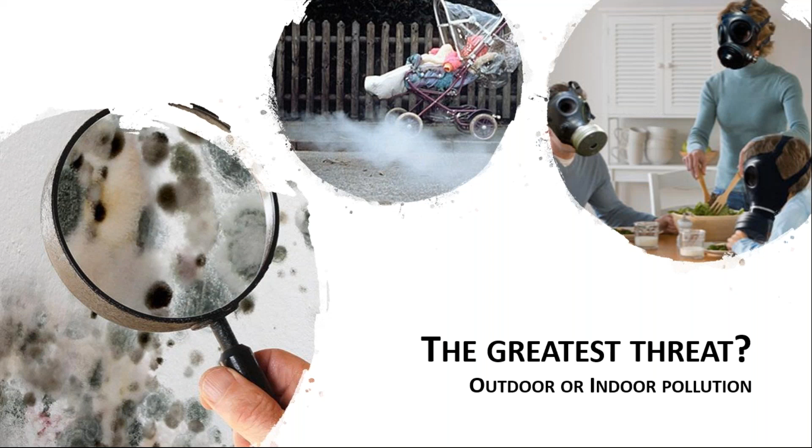Understanding the outdoor environment and how we apply that understanding to developing better natural and mechanical ventilation solutions, and then coming toward the end, what we're dealing with in terms of moving forward and dealing with this pandemic.

If I look at the micron size of the particles, they're very similar to the particulates I'd be dealing with from vehicle emissions and general PM, or particulate matter pollution, that we'd be dealing with in our research. So I'm going to look at the parallels between what we do and how we understand particle transport in a similar context to aerosols.

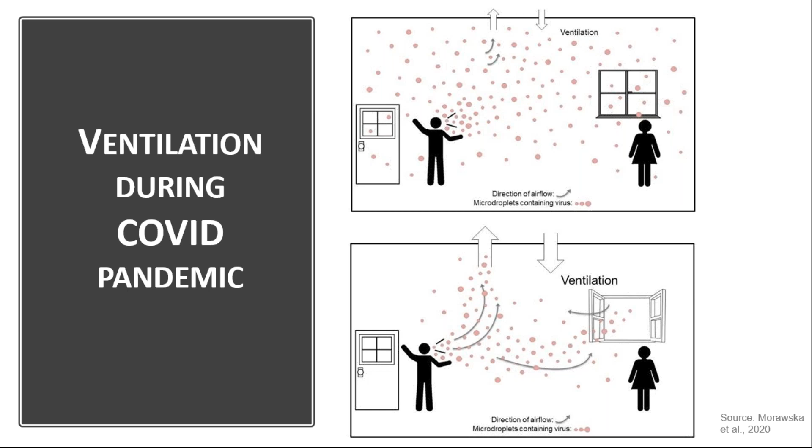Today I've prepared the presentation to start off with a context of how I approach particulate pollution, or aerosol pollution as this may be, as a problem, and then give you an understanding of our work and why we approach it from a mitigation standpoint.

Then I'm going to discuss the outdoor environment and outdoor exposure, which is actually an area we've worked in for many years, but it informs how we look at indoor exposure. And then look at the steps towards providing cleaner air, whether it's outdoor or, more specifically today, the indoor environment.

And then for a few minutes, give you some innovations in terms of mechanical ventilation and natural ventilation design that we have under investigation, or have investigated historically, concepts that can help manipulate or engineer the environment so that particles move the way we want them to, or aerosols in the case of COVID.

But I'm going to finally conclude, before concluding, by returning to my context, specifically the campus that I normally get to walk into every morning in Trinity College, Dublin, and give you a flavour of the challenges we face when it comes to returning to university and ensuring that ventilation is a big part of our face-to-face with students.

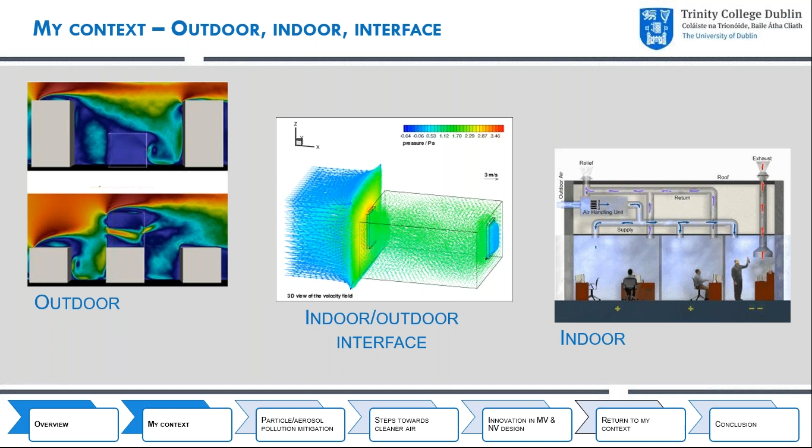So how do we approach these types of problems? Maybe this is obvious to you, but a lot of people are experts in measurement of indoor and outdoor environments in terms of air pollutants. We have many years of experience in this field, and it's very complex. It's not as simple as buying a monitor and positioning it. There's a huge amount of considerations in terms of collecting data in the right location that is representative of a given area.

The same goes for the other environmental variables required to develop and use measurement information for developing models that can look at scenario analysis around the interactions between the outdoor and indoor environment. Many people are working in that area.

So for us, what we've tried to focus on in our work is: we measure, we model, but we always want to mitigate particulate pollution exposure. Our main focus, and our pillar that we try to work under always, is passive solutions. If we can, we want to develop solutions that are low energy or zero energy, so we're always trying to look at energy efficiency, as previous speakers in the program have talked about.

Maybe COVID is now taking away that focus, but even in this COVID environment, we want to present ventilation solutions that are passive in nature, or really zero or very low energy. Natural ventilation is a natural preference there, but it's a much more complex problem to manage and control. That's why we prefer mechanical ventilation, because we can control the conditions.

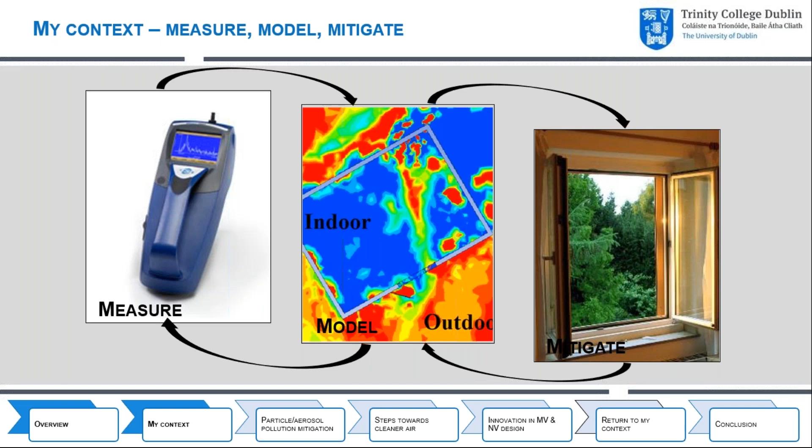But when you have something controllable working together with natural ventilation, which is not so controllable, the question is: are we allowing the outdoor environment to have some level of control in an indoor environment? I'll come on to the context where I feel we're going to have challenges when it comes to returning to university, specifically in more historical buildings.

There are really three different contexts and areas that we've worked in, and they all have interconnectivity in the approach we take. Whether it's a pedestrian on a footpath in a street, trying to understand airflow and pollutant dispersion in that environment requires a complex level of measurement, modeling, and then a strategy developed around mitigation. We've done lots of research in the field in that area.

But then we've also transposed that into mechanical ventilation inlets, and my colleagues are leading in terms of designing novel technologies, which I'll show you later, around trying to keep the particulates out. So really what we're trying to do is reduce exposure, whether it's you in the outdoor environment or the indoor environment, and whether the air is being directly or indirectly transported to you in a passive or an active, energy demanding method.

One area we've moved into in recent years is natural ventilation openings in both residential and commercial buildings. I have an illustration of a window, but you could also think about the small vents in most rooms in modern homes to allow for sufficient air changes. What we want to do is stop particulate pollution entering, but also allow a free escape of a given particulate, or in the COVID sense, an aerosol to escape.

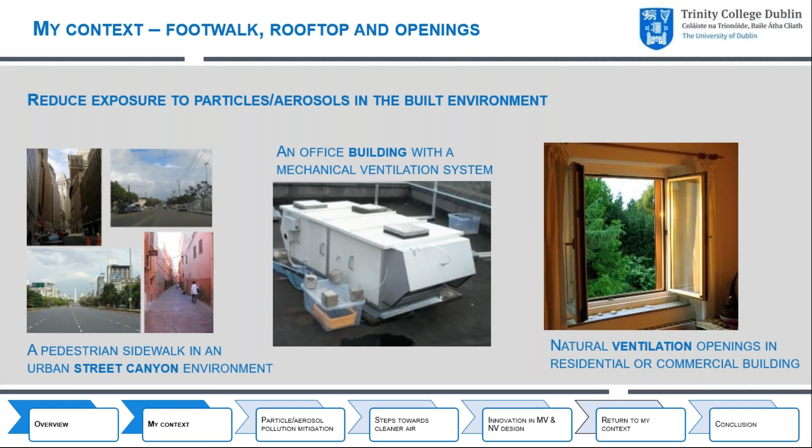So the context, to end on my approach, is that there are short-term and long-term impacts of ventilation solutions. In the short term, we're dealing with this COVID aerosol pandemic. But in the long term, in the life cycle of buildings, what we're dealing with is a problem that will hopefully not linger, but we still want a solution that continues beyond the pandemic, where indoor air quality is considered a priority. So any changes we make now should have a long-term benefit.

In the context of where we approach the problem, a lot of work around the boundary conditions is what I would refer to of the problem. When you consider ventilation, and the figure from a few slides ago around the open window and aerosols escaping, what you're not considering is what is happening outside that window, and where are the aerosols going. If you're facing a very strong wind, how is that natural ventilation outlet behaving, and how are air change rates being affected in that space?

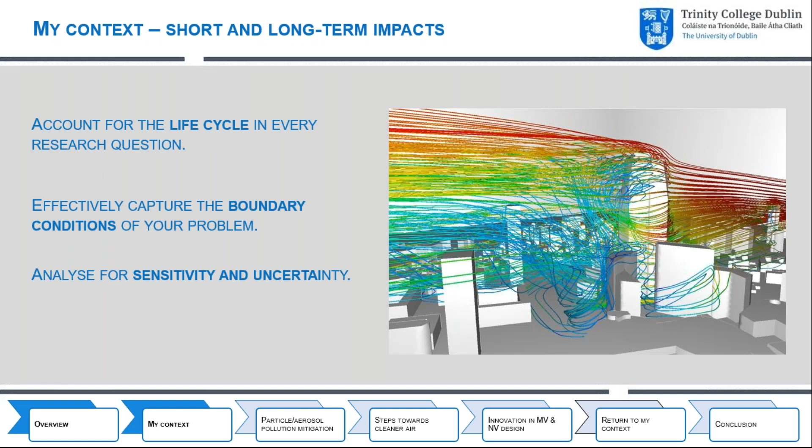This is historical buildings or older buildings that have combined systems that were not designed in unison, creating a lot of challenges in this space. So there's a lot of uncertainty around how we analyze and build up the most suitable ventilation system that works and allows natural and mechanical to work in harmony, or if natural is on its own, to be effective in the pandemic circumstances.

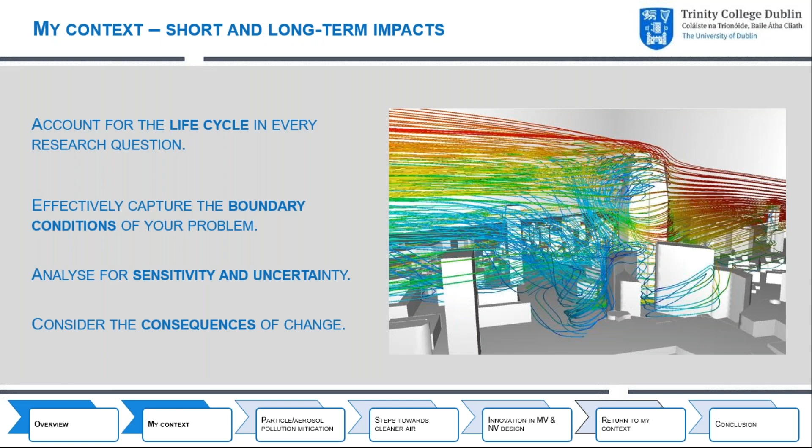So the consequences of change is really what we're trying to ensure. And again, this long-term impact—that we make changes for COVID—will they have positive impacts beyond that?

So from an outdoors perspective, even your simple street is a very complex environment. When it comes to particulate transport or aerosol transport in the air, no two streets are the same. This is a very simple illustration of a three-dimensional street. Forgive the crudeness, but it's just to show that there are some predominant airflow patterns.

What's missing is that once you add physical features into such a space, you create turbulence and additional, more complex airflow patterns that can affect the personal exposure of an individual walking on the street, but also the ventilation capacity of a natural ventilation opening—a window or a door, to a shop or a domestic home, or a window on a first or second floor. The more complex the 3D geometry is, the more influential the role of natural ventilation may have on air movements in the home.

So just opening a window doesn't assume the air is going to escape. A lot of people think opening a window in one room will naturally change it, but the outdoor environment in which you're opening that window can have a significant influence.

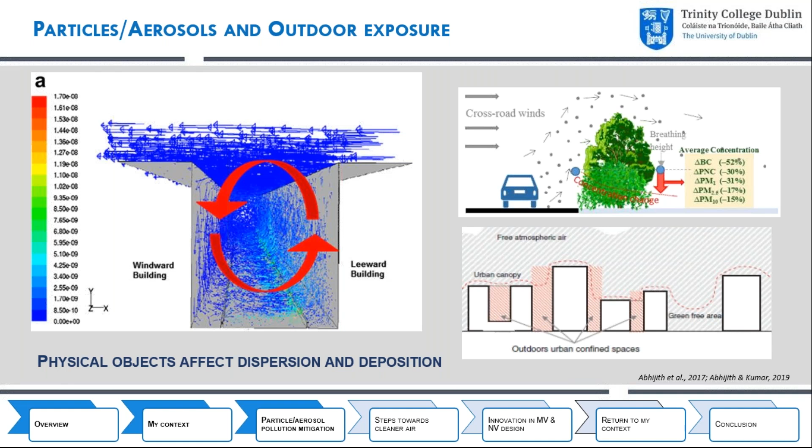So some of our work is around developing mitigation measures—barriers, physical structures—in the outdoor environment of a street, trying to improve air quality for an individual. But the challenge is always ensuring you're dealing with a very dynamic environment. You want a solution that improves air quality and doesn't trap pollution as well to some degree. Trying to create a solution that has a long-term benefit is quite tricky, with knock-on effects to the likes of ventilation ducts on facades of buildings being another one.

So the question is, when it comes to urban morphology, this really complex built environment, how do we design effective ventilation? For example, most recently we've been working around the area of coffee shops, and unfortunately, like many of you perhaps, I haven't visited many coffee shops recently. We hope that would return quite soon.

The idea is that ventilation into perhaps a small coffee shop is predominantly through some mechanical outlets, but also the front door or windows provide a strong feature, and the effective design may have incorporated those considerations. But then a coffee shop decides to put awnings and barriers around their outdoor environment, creating an outdoor seating area, and that completely changes airflow patterns.

It stagnates the air. It also affects very much the airflow into and out of the coffee shop. So what's important is trying to understand and consider these consequences, these added components, and how they affect indoor-outdoor exchange, and also trying to use them to our benefit. How do we design it so that we get the outcome that we want? How do we improve the circumstances?

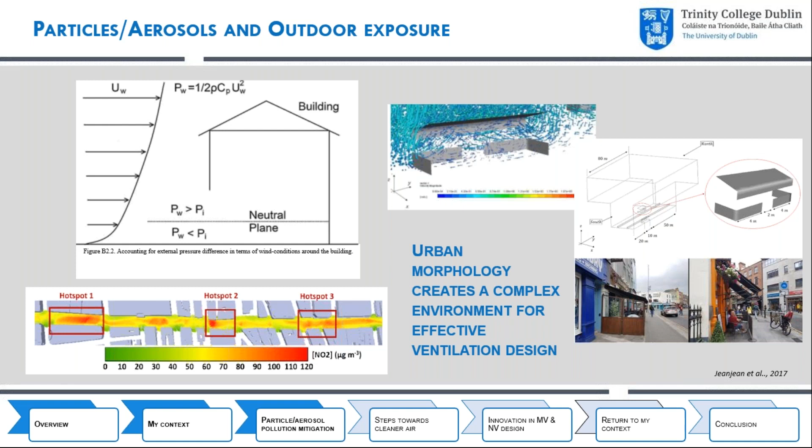And so that's the outdoor environment.

Then for our view on indoor, we try to understand the indoor environment. Some of these illustrations are representative of three-dimensional problems, a cross-section of three-dimensional problems, because I've noted over the last few months a lot of people are undertaking studies around the impact of aerosol transport in the indoor environment, and some are utilizing two-dimensional models.

Two-dimensional models serve a role to some degree, but they can significantly misinterpret the dispersion patterns. For those trying to develop ventilation plans, it is a challenge to really do so with two-dimensional models. The truth is that a two-dimensional model is much faster than developing a three-dimensional model, by a magnitude to some degree. So in terms of getting results that can inform how we make this transition to allow for adequate ventilation in this COVID world, it is important that we are thorough in our assessment.

From this indoor environment, one big major thing is the temperature profiles across a space in 3 dimensions, ideally incorporating the natural ventilation and mechanical ventilation impacts, and in particular trying to understand how natural ventilation will be used as the seasons change. I think a lot of assessments may be looking at the maximum scenario where natural ventilation is used to its capacity, but as we change into the winter season this is going to be less likely. So it's important that we take that into account.

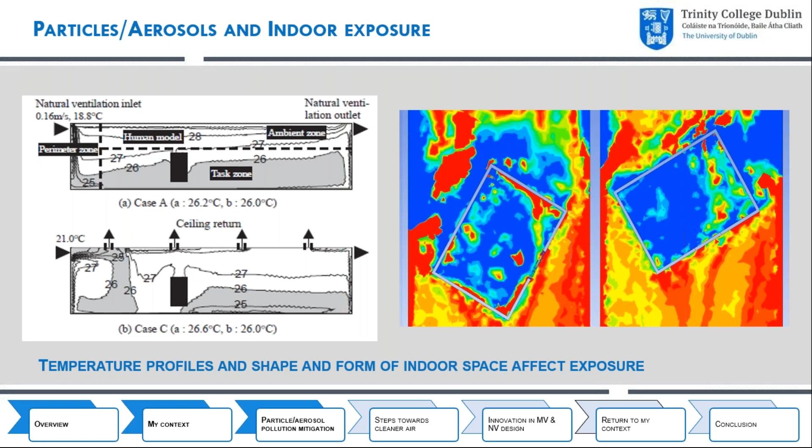It's important to consider the temperature profiles from an indoor environment, but also the impact of the outdoor temperatures and the wind speed and wind direction it may be facing, which may make natural ventilation a very unfavorable option when it comes to trying to improve air quality or allow sufficient air changes. Needless to say, it's not as if you open a window and you are receiving a clean airflow or continuous airflow across the full area.

In reality, what you have is a very complex pattern - this is just an example of particulate matter entering into an indoor space. What you have is a very mixed concentration across the profile. So the reason I want to highlight this is that, as I say, no two windows are the same in terms of how they open and how they allow airflow in.

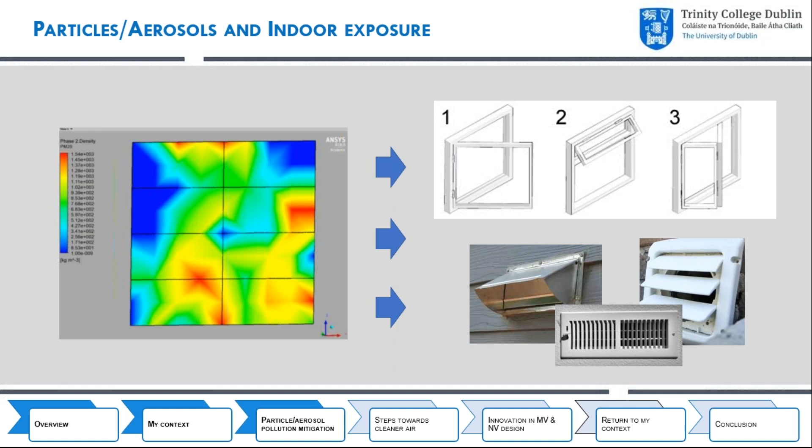The angle in which you open it, the orientation of the window opening, and the location of the window opening - all of these factors play a role in movement of particulates from outdoor to indoor, and indeed from indoor to outdoor when it comes to aerosols. The same is to be said, as we've been working in more recent years on natural ventilation ducts for domestic buildings, in that all of these different types and designs of openings all affect the airflow patterns in and out of a building, which can play a significant role in trapping aerosols in the indoor environment.

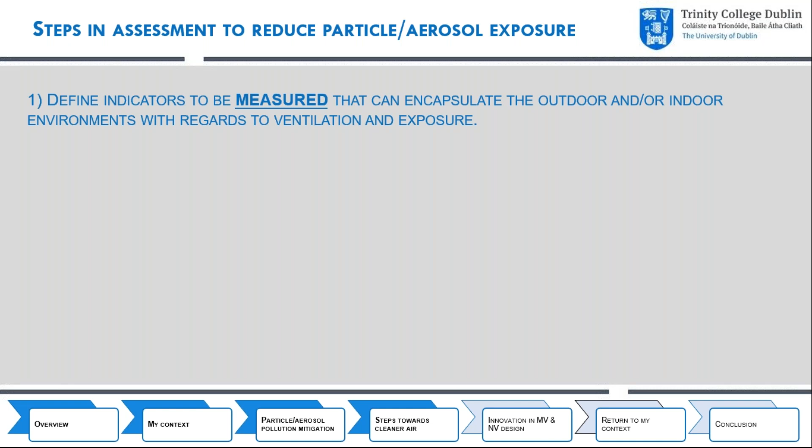So in terms of how we approach a problem - and that's really what today is about, as much as approaching the problem as defining a solution, because a solution needs to be tailored to the given environment - there are three kinds of approaches in terms of defining indicators that can help support measurements, and what you need to measure to capture how the outdoor and indoor environments are performing in terms of ventilation, or personal exposure to a pollutant, an aerosol like COVID.

Then what you want to do is consider the factors that need to be considered in modeling, because measurement does not solve the problem - you need to understand it more so as well. The measurement and modeling for us is a combined approach, and you need to collect adequate data to do so. So you need to really understand what factors need to be considered in that.

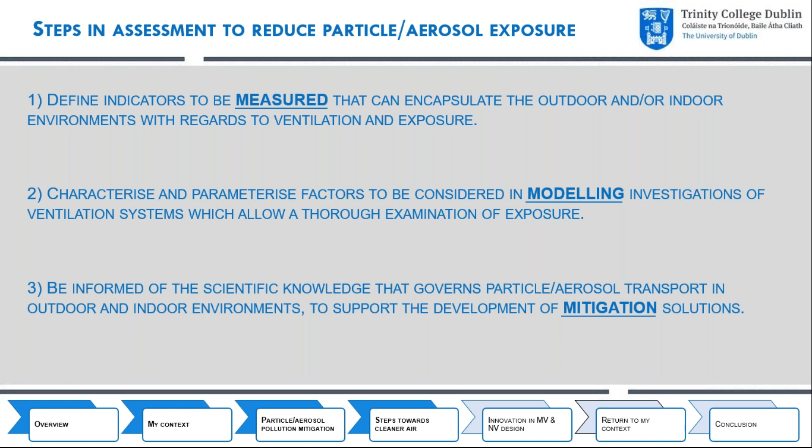But then lastly, obviously our role is to try and mitigate, and that's the most important step - that's where the definitive guidelines that the likes of ASHRAE are now developing are trying to help, to provide adequate ventilation in the indoor environment where we spend 9/10 of our time. So we have to have scientific knowledge around understanding particle transport or aerosol transport. It's putting these three pieces of the puzzle together that is required to really understand, in the specific area, the impact of the outdoor on ventilation, whether it's natural or mechanical.

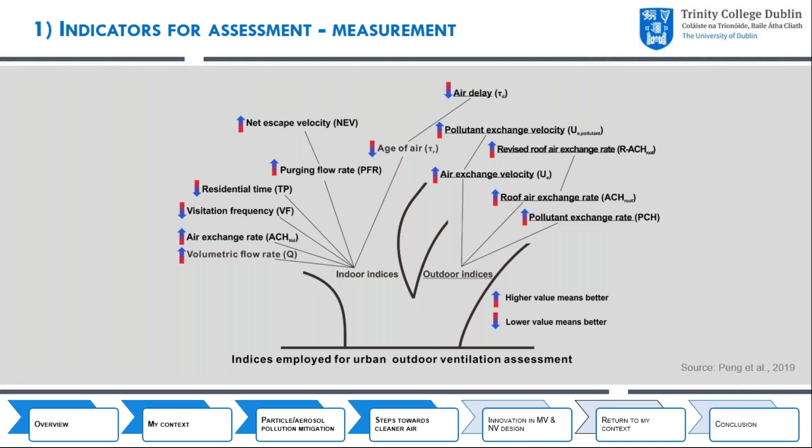So this is just a brief example of all the different types of indices and indicators out there for capturing how indoor or outdoor ventilation is performing. But what we need is the ability to put the two together and understand the interaction between them, and more indicators need to align with one another to do so.

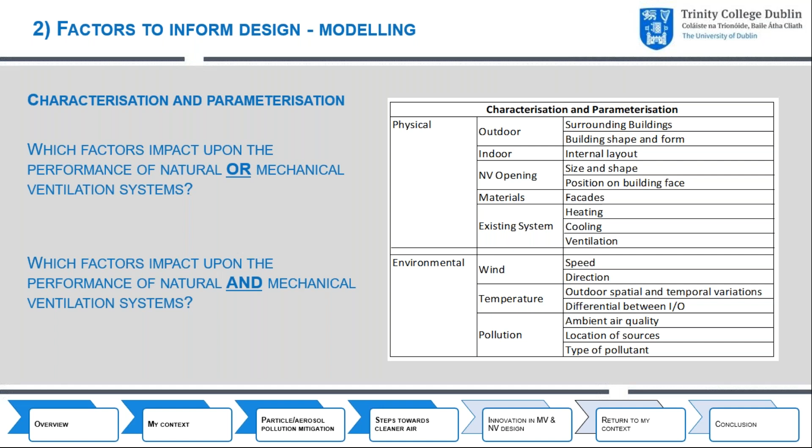So the last step draws upon some of our research, which I'll come to in a moment, around trying to understand and use scientific knowledge. This is an example of the type of scientific knowledge out there, around a phenomenon called aspiration efficiency, which we've applied in our research to understand how we can manipulate or engineer solutions to keep particulates out. We've also reversed the science - if you understand how to keep particulates out of a system, how do you ensure they also enter a system?

That's where it's very important to engage with the scientific community, and that's where innovations really take place around solutions. ASHRAE is a great community that manages to capture the expertise of industry and academia in developing solutions. These are just a number of factors, and that's what I want to highlight today - there are many different factors, and we're not always experts in all of them. That's where it's really important to work together on developing solutions, whether technological solutions or guidance.

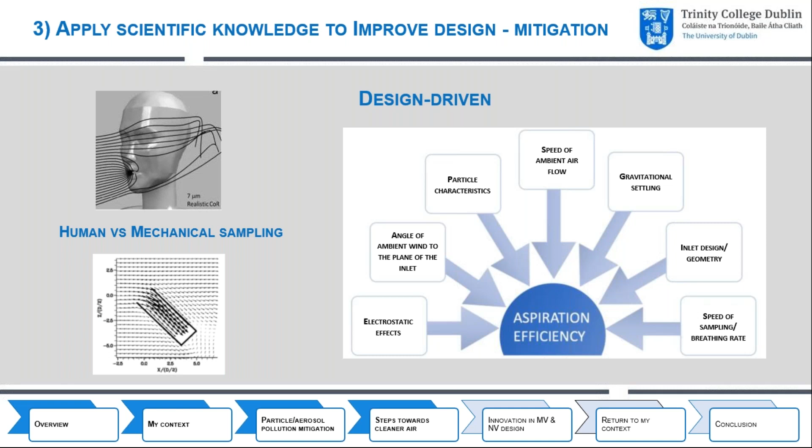What we've done in our work is essentially develop technology - and my colleagues really have led in this - to reduce the concentration of particulates from the outdoor environment entering the indoor environment. We could stop a third of particulates before they even reach a filter, simply by understanding the outdoor environment and how airflow patterns and air movements occur around a mechanical ventilation inlet.

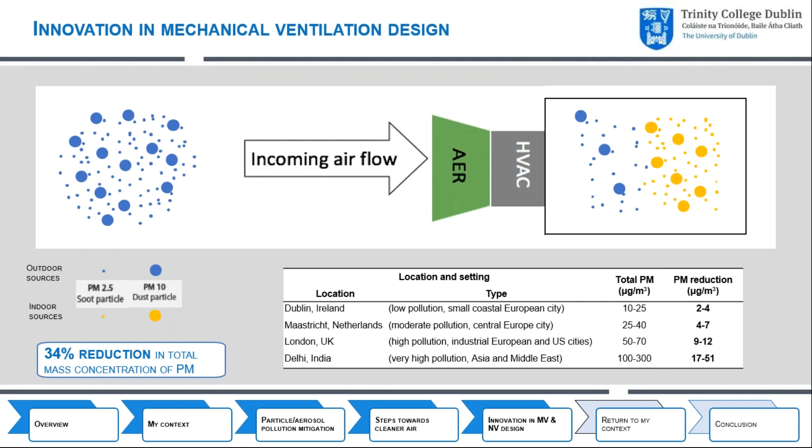What we've now moved on to is looking - and my main role is looking at natural ventilation in that same area - how can you manipulate it? The reason we do that is, as I mentioned earlier, energy. We have a scenario where improved filtration means better filters, but now those filters may have shorter lifespans, we may have increased pressure drop, and more filters are required, which also means more energy.

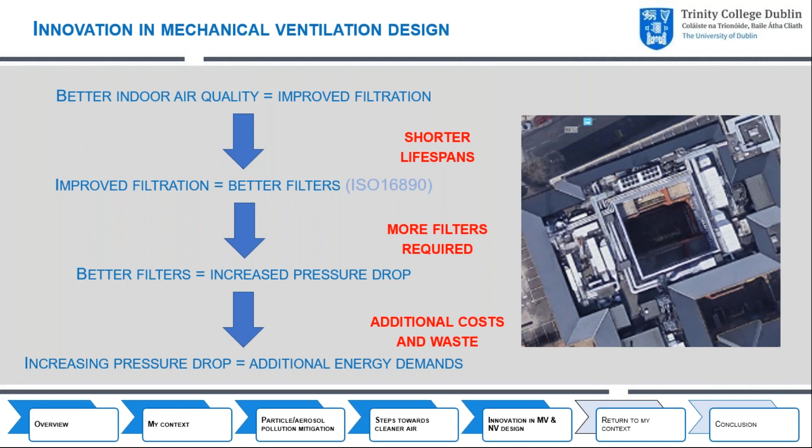So better indoor air quality through filtration is one way, but if we can provide a way that passively, without energy, can remove some of the particles, then we can have better indoor air quality with zero additional energy demands. Filtration is very much an important part of mechanical ventilation, but our approach is to support that energy goal while maintaining excellent indoor air quality from a mechanical standpoint.

So how do we then use that information to inform better design of natural ventilation? How do you inform the design of novel openings to keep the particulates out and allow the ventilation in? In the way that we've applied scientific knowledge around mechanical ventilation design, we're now applying it around natural ventilation design.

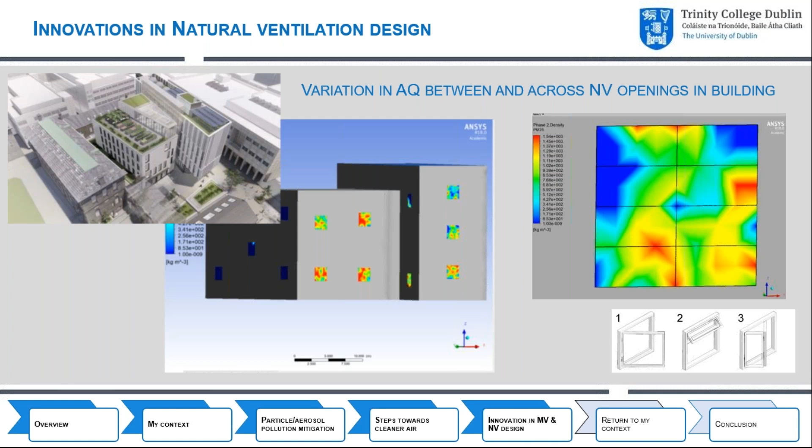So you could look at this from a particulate matter or aerosol concentration perspective, but you could also look at it from a velocity standpoint, because what you still want to do is ensure thermal comfort, and comfort in general around draft and being exposed to drafts—around how you can design novel natural ventilation openings informed by understanding the outdoor environment.

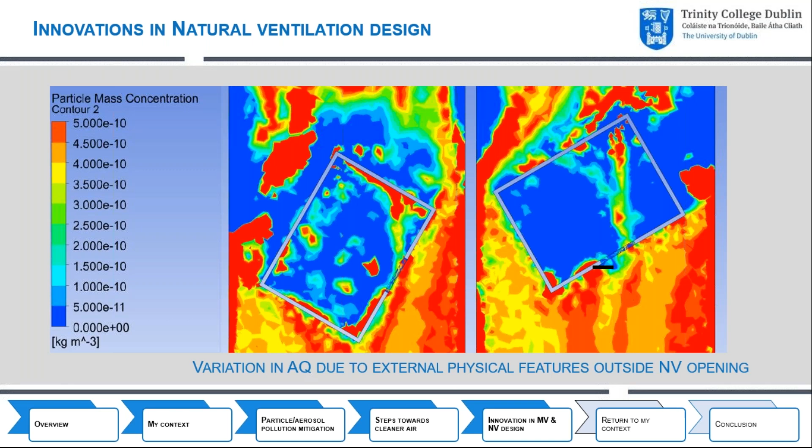So this is where I'm at, and back to my context. I'm trying to stay on time, so I apologize if I've run through some of these slides. But what's fantastic is that we have new modern buildings in our university, with fantastic lecture facilities for students returning in the next few months, very much dominated by mechanical ventilation systems, which are very effective and provide adequate air change rates and ventilation requirements.

However, I am very fortunate, and I still consider my fortune even in the circumstances, to get to teach in historical buildings on campus, like the 175-plus-year-old museum building, which is a piece of art and something I very much enjoy walking into when on campus. But it's a very complex space in terms of ventilation.

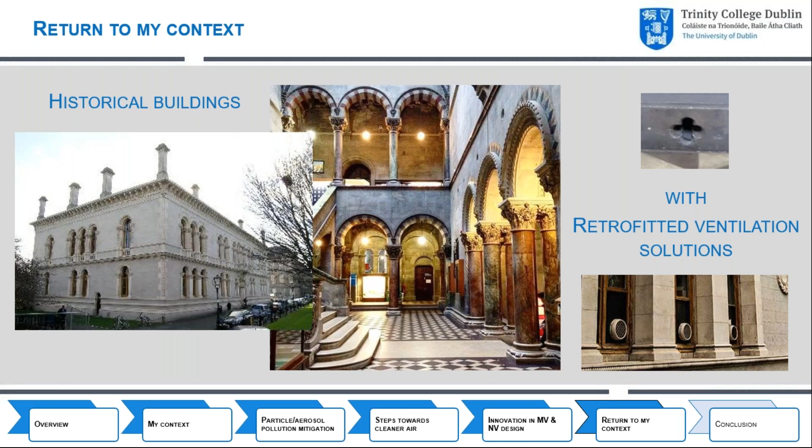I won't go into it, but there's a fascinating ventilation story around this room, whereby any kind of ventilation ducts are seemingly retrofitted to windows, so it's quite limited in terms of how it was designed. It was simply retrofitted, and every room is different. Every lecture theatre is distinctive in its shape and size and the type of natural and/or mechanical ventilation in it. So the challenge we face is how do we try to ensure adequate ventilation.

To be honest, there is no clear answer yet, because at the very beginning I highlighted it's almost like a case-by-case assessment to ensure adequate ventilation in these kinds of spaces. So in terms of COVID, we're dealing with an immediate concern to give adequate ventilation. But we always should remember that we have a long-term vision here.

If we're making changes and improvements in ventilation, they're going to play a role in improving indoor air quality or indoor environmental quality beyond the COVID pandemic, when we hope to get back, or get to this new normal. So the challenge still has to be considered—as we move through the seasons, will that open window, as the illustration shows, really be permitted?

So we're dealing with a very dynamic system. And the reason, I think, is that we don't really understand the impact of the outdoor environment on how natural ventilation openings perform and how it affects indoor-outdoor interactions. So really, when it comes to ensuring adequate ventilation during COVID, it's still a real challenge, particularly in older buildings that have hybrid kind of

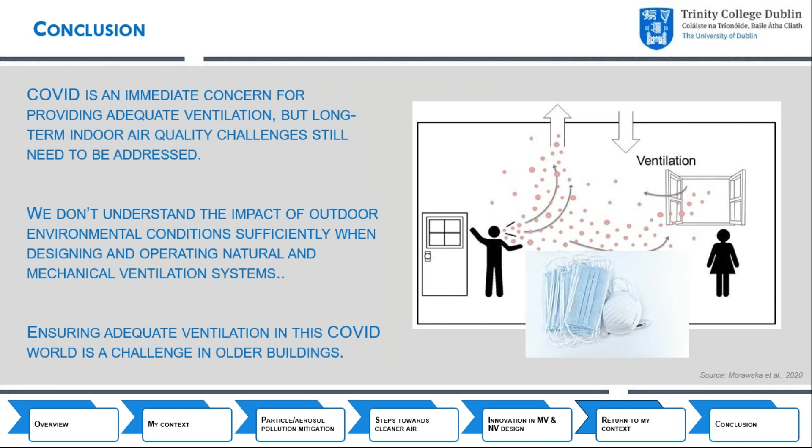It's really something I haven't perhaps... I couldn't say definitively that is the case, but I think the preferred option is that we protect the individual from one another. This way we guarantee that no matter how complex the space, the short-term solution will be effective, and the long-term solution, as we return to normal, will also be effective. So that's my perspective on the role of the outdoor environment and the need to consider it in terms of natural and mechanical ventilation design.